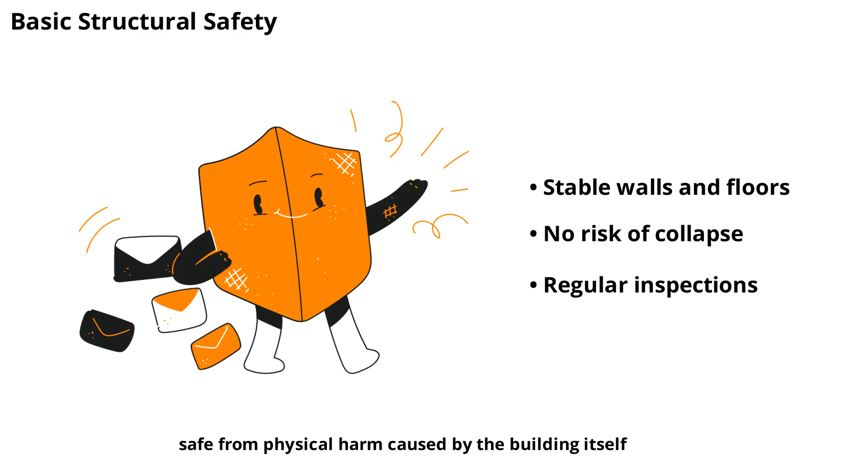One of the core aspects of habitability is structural safety. This means the building must be stable and secure. There should be no risk of collapse, and all walls, floors, and ceilings must be in good repair. Structural problems can lead to serious injuries or even fatalities, so regular inspections and prompt repairs are essential. A habitable home is one where you can feel safe from physical harm caused by the building itself.

Access to clean, running water is a fundamental part of habitability standards. Every habitable home must have a working water supply for drinking, cooking, cleaning, and bathing. The water must be safe and free from contaminants. If a property lacks running water or the water is unsafe, it fails the habitability test. This requirement is not just about convenience, it's about protecting health and hygiene for everyone living in the home.

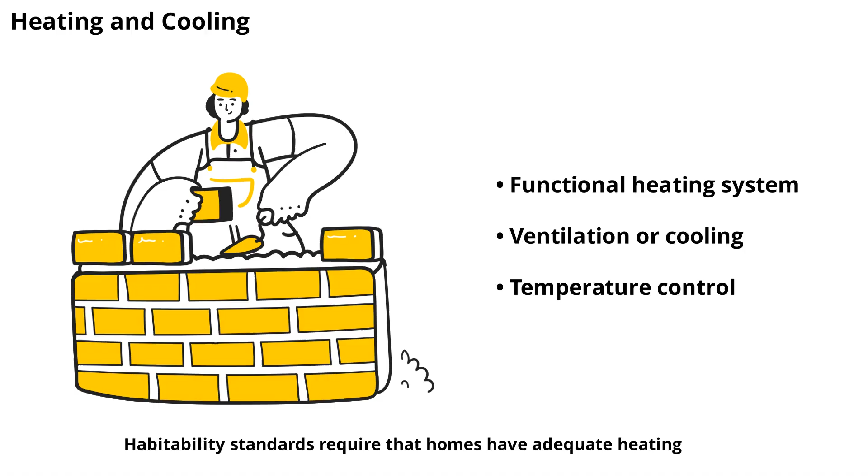Habitability standards require that homes have adequate heating, especially in colder climates. This means there must be a safe and functional heating system to keep residents warm during winter. In some areas, cooling or ventilation may also be required to prevent overheating in summer. Without proper temperature control, a home can quickly become unlivable, posing risks to health and comfort.

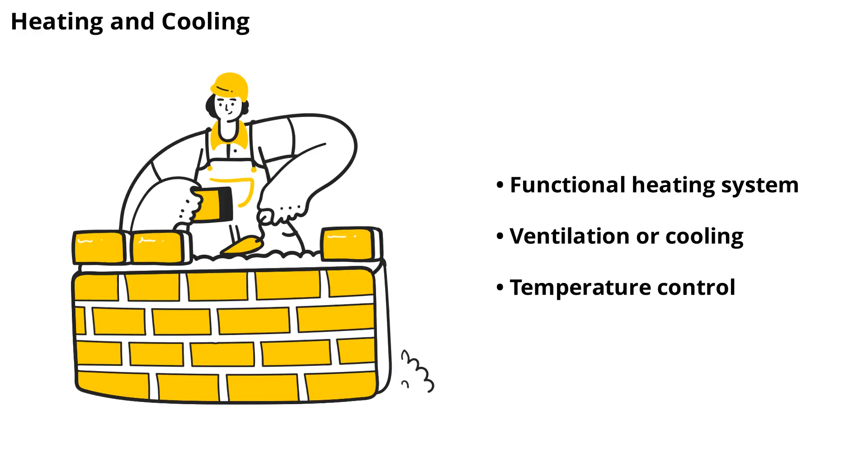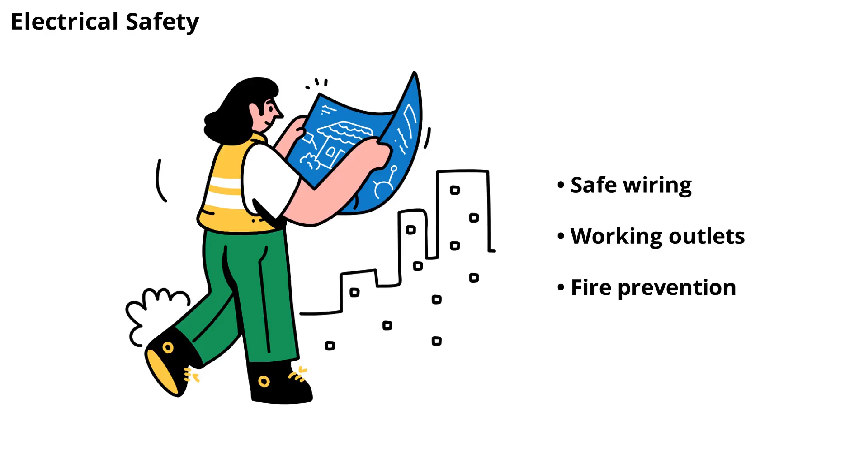A habitable home must have safe and reliable electrical systems. This includes working outlets, lights, and wiring that meet safety codes. Faulty electrical systems can cause fires, shocks, or power outages, all of which are serious hazards. Regular maintenance and prompt repairs are necessary to ensure that the electrical system remains safe for everyone in the home.

Proper plumbing is another key requirement. This means all sinks, toilets, and showers must work correctly, and sewage must be safely disposed of. Leaks, blockages, or sewage backups can make a home uninhabitable and pose serious health risks. Habitability standards ensure that plumbing systems are maintained and any issues are quickly addressed.

Habitability standards require that homes are free from infestations of pests, like rodents, insects, or other vermin. Pests can carry diseases and cause damage to the property. Landlords are typically responsible for ensuring that the home is pest-free at the start of a tenancy and for addressing infestations that arise due to structural issues or other factors beyond the tenant's control.

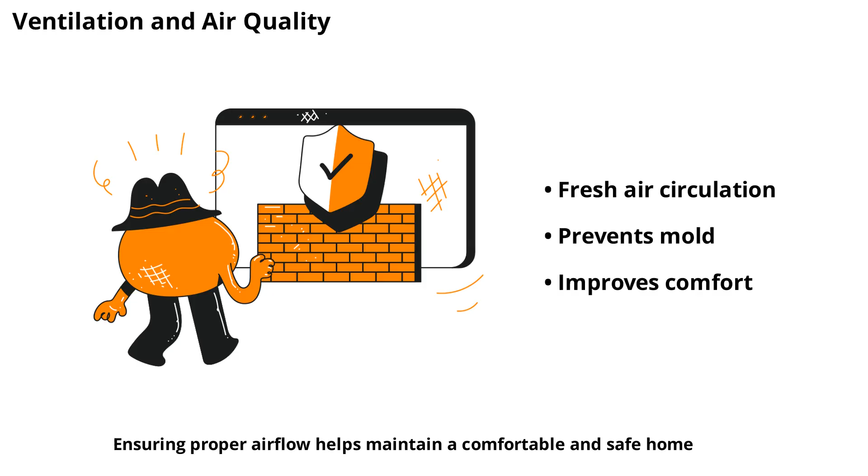Good ventilation is essential for a healthy living environment. Habitability standards require that homes have windows or mechanical systems to allow fresh air in and remove stale air. Poor ventilation can lead to mold growth, unpleasant odors, and health problems. Ensuring proper airflow helps maintain a comfortable and safe home.

A habitable home must have adequate lighting. This includes both natural light from windows and artificial light from fixtures. Proper lighting is important for safety, comfort, and mental well-being. Dark or poorly lit spaces can be hazardous and make daily activities difficult. Habitability standards ensure that every room has enough light to be used safely and comfortably.

Sanitation is a cornerstone of habitability. Every habitable home must have working toilets, sinks, and bathing facilities.

These must be kept clean and in good repair. Without proper sanitation, residents are at risk of illness and discomfort. Habitability standards ensure that everyone has access to the basic facilities needed for hygiene and health.

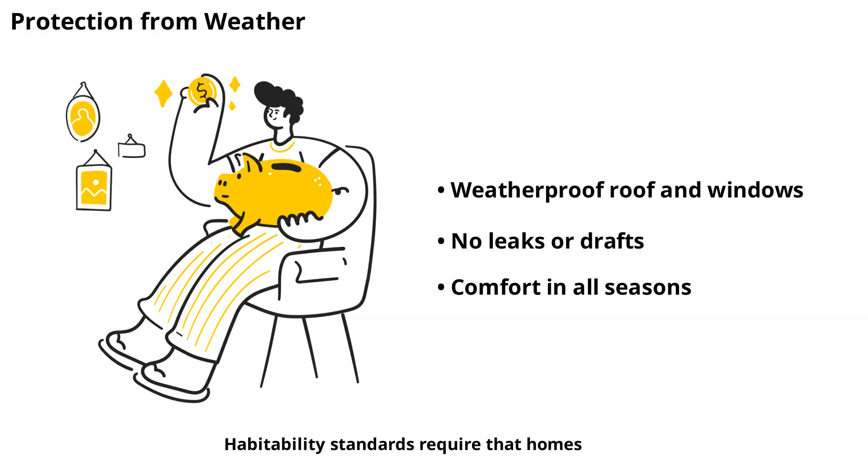Habitability standards require that homes provide adequate protection from the weather. This means the roof, windows, and doors must keep out rain, wind, and extreme temperatures. Leaks or drafts can make a home uncomfortable and even dangerous. Proper insulation and weatherproofing are essential for maintaining a habitable environment.

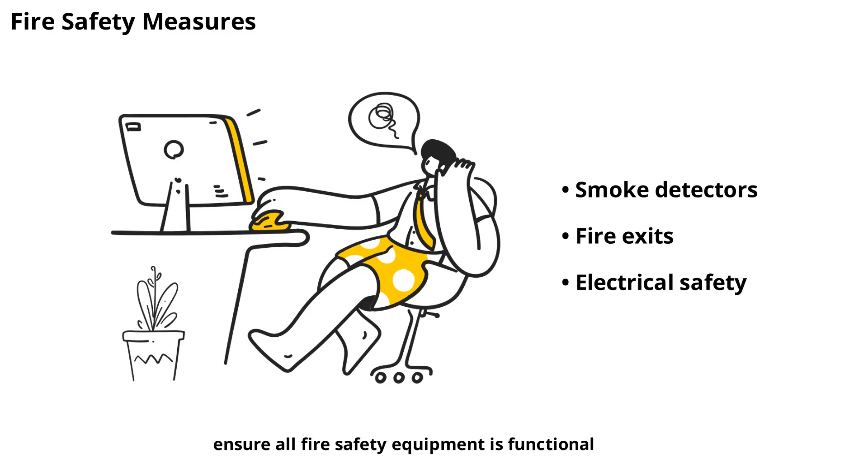Fire safety is a critical part of habitability. Homes must have working smoke detectors, fire exits, and sometimes fire extinguishers. Electrical systems should be up to code to prevent fires. These measures save lives and are often required by law. Regular checks and maintenance are necessary to ensure all fire safety equipment is functional.

Security is another important aspect of habitability. All doors and windows should have functioning locks to protect residents from intruders. In some areas, additional security measures like deadbolts or security bars may be required. A habitable home is one where residents can feel safe and secure at all times.

Stairs and railings must be safe and in good repair. Loose steps or broken railings can cause accidents and injuries. Habitability standards require that all stairs, handrails, and guardrails are sturdy and properly maintained. This is especially important in multi-story buildings or homes with elderly or young residents.

Older homes may contain hazardous materials like lead paint or asbestos. Habitability standards require that these hazards are identified and properly managed. Exposure to lead or asbestos can cause serious health problems, especially for children. Landlords must take steps to remove or contain these materials to ensure the home is safe.

Mold and excessive dampness are common issues that can make a home uninhabitable. Habitability standards require that homes are free from mold and have no persistent dampness. Mold can cause respiratory problems and other health issues. Proper ventilation, repairs, and moisture control are necessary to prevent these problems.

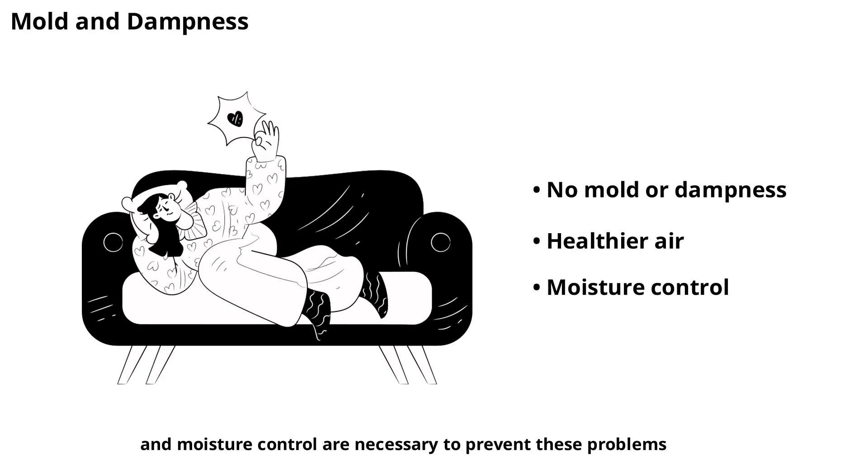Proper garbage disposal is required for a habitable home. There must be a way to safely store and remove trash to prevent infestations and odors. Overflowing garbage can attract pests and create unsanitary conditions. Habitability standards ensure that every home has access to regular waste collection and proper storage facilities.

Habitability standards often include requirements for minimum space per occupant. Overcrowding can lead to health problems and increased wear and tear on the property. Each resident should have enough space for sleeping, living, and storing personal items. These rules help ensure a comfortable and healthy living environment for everyone.

Accessibility is an important part of modern habitability standards. Homes should be accessible to people with disabilities, which may include ramps, wider doorways, or adapted bathrooms. These features ensure that everyone, regardless of physical ability, can live safely and comfortably in their home.

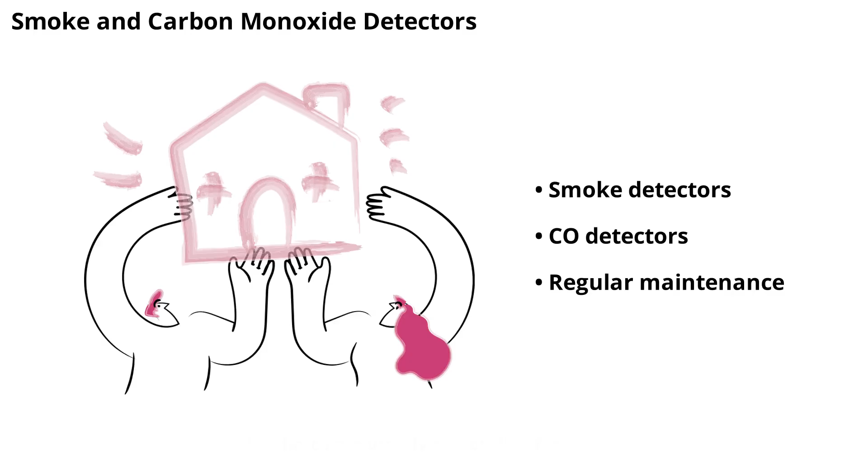Working smoke and carbon monoxide detectors are required in most homes. These devices alert residents to dangerous conditions and can save lives. Habitability standards specify where detectors must be installed and require regular testing and maintenance. Landlords are usually responsible for providing and maintaining these safety devices.

Every habitable home must have safe and accessible emergency exits. This means doors and windows that can be easily opened in case of fire or other emergencies. Blocked or locked exits are a serious safety hazard. Habitability standards ensure that residents can escape quickly and safely if needed.

Floors and surfaces must be safe and free from hazards. This means no loose tiles, torn carpets, or slippery areas that could cause falls. Habitability standards require that all walking surfaces are in good repair and safe for everyday use. This helps prevent accidents and injuries in the home.

A habitable home must have basic kitchen facilities. This includes a sink with running water, a way to cook food, and safe storage for food and utensils. Without these, it's difficult to prepare meals safely and maintain good nutrition. Habitability standards ensure that every home has the essentials for healthy living.

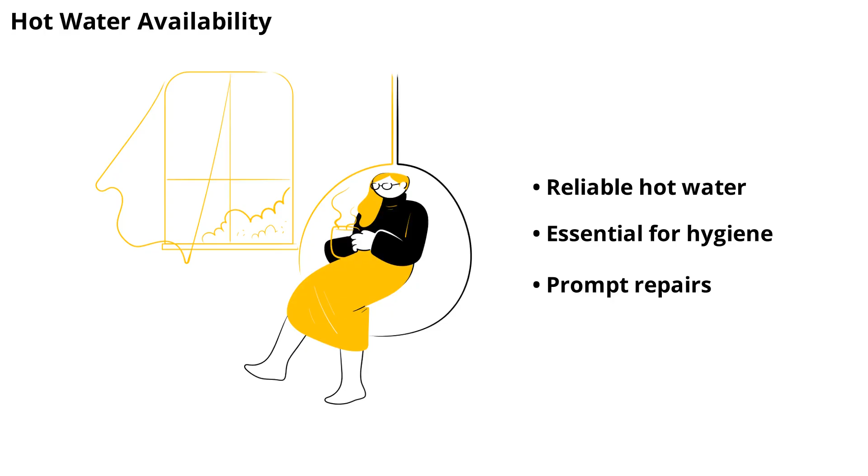Hot water is essential for bathing, cleaning, and cooking. Habitability standards require that every home has a reliable supply of hot water. If the hot water system fails, it must be repaired promptly. This is not just a matter of comfort, it's necessary for health and hygiene.

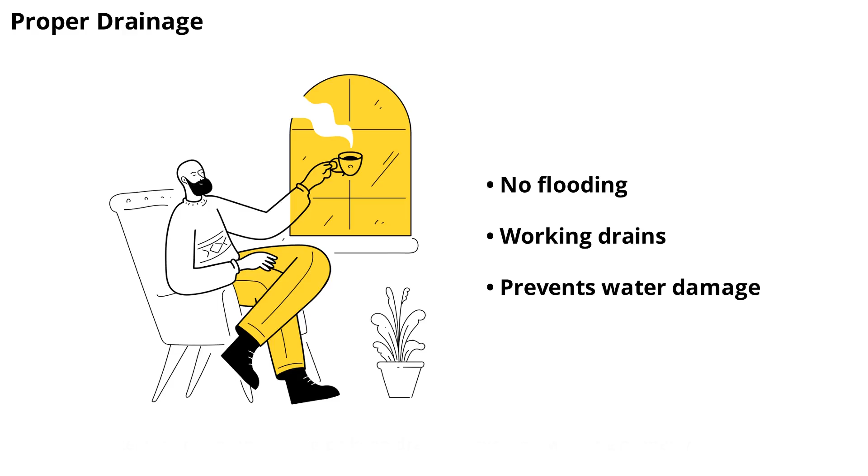Proper drainage is necessary to prevent flooding and water damage. Habitability standards require that rainwater and wastewater are directed away from the home. Blocked or broken drains can cause serious problems, including mold and structural damage. Regular maintenance helps keep drainage systems working properly.

If a home uses gas for heating or cooking, all appliances must be safe and properly maintained. Gas leaks can be deadly, so regular inspections and prompt repairs are essential. Habitability standards require that gas systems are up to code and that residents know how to report any issues.

Habitability standards also mean that the home must not be used for illegal activities. This includes drug manufacturing, illegal gambling, or other criminal behavior. Such activities can make a home unsafe and put residents at risk. Landlords and tenants alike have a responsibility to ensure the property is used lawfully.

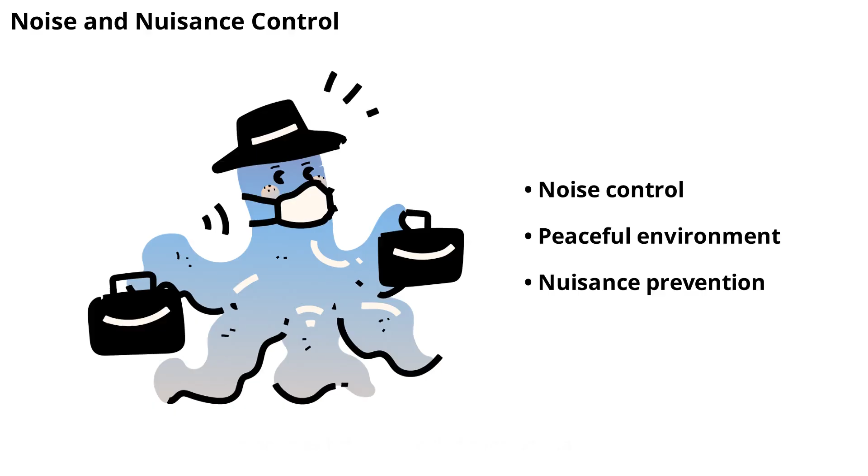Excessive noise or nuisance from neighbors can make a home uninhabitable. Habitability standards may include rules about noise levels and nuisance behavior. These rules help ensure that everyone can enjoy peace and quiet in their own home. If problems arise, tenants can often seek help from local authorities.

Both landlords and tenants have responsibilities for maintaining a habitable home. Landlords must make repairs and keep the property up to standard, while tenants must report problems and avoid causing damage. Clear communication and prompt action are key to maintaining habitability.

If habitability standards are not met, tenants have the right to report violations to local authorities. Many cities have housing departments or health agencies that investigate complaints. Reporting problems helps ensure that everyone has access to safe and healthy housing.

When a landlord fails to meet habitability standards, tenants may have several remedies. These can include withholding rent, making repairs and deducting the cost, or even moving out without penalty. The exact remedies depend on local laws, so it's important to know your rights and follow proper procedures.

Landlords also have defenses if accused of violating habitability standards. For example, if a tenant causes the problem through neglect or misuse, the landlord may not be responsible. Documentation and communication are important for both parties to protect their interests.

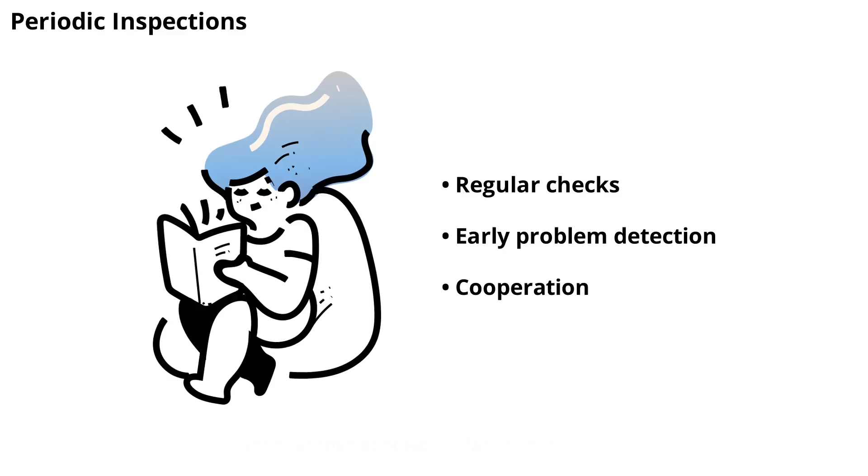Regular inspections help ensure that homes remain habitable. Landlords may conduct periodic checks to spot problems early and make necessary repairs. Tenants should cooperate with inspections and report any issues they notice. This proactive approach helps maintain a safe and comfortable living environment.

Habitability standards can vary by location. Some cities or states have stricter rules than others. It's important to check local laws to understand exactly what is required in your area. Local housing agencies or legal aid organizations can provide guidance if you have questions.

Habitability standards are not just a local issue, they're important worldwide. Different countries have their own rules and expectations for housing quality. While the details may vary, the goal is always to ensure safe, healthy, and dignified living conditions for all residents.

Housing inspectors play a key role in enforcing habitability standards. They visit properties, check for violations, and order repairs when necessary. Inspectors help ensure that landlords meet their obligations and that tenants have safe places to live.

Educating tenants about their rights and responsibilities is crucial. Many organizations offer resources to help tenants understand habitability standards and how to address problems. Informed tenants are better equipped to protect their health and safety.

Landlords also benefit from training on habitability standards. Understanding the rules helps them avoid legal trouble and keep their properties in good condition. Many local agencies offer workshops or guides for landlords to stay up to date.

Disputes over habitability are common. Tenants and landlords may disagree about what repairs are needed or who is responsible. Clear documentation, communication, and knowledge of the law can help resolve these issues fairly and efficiently.

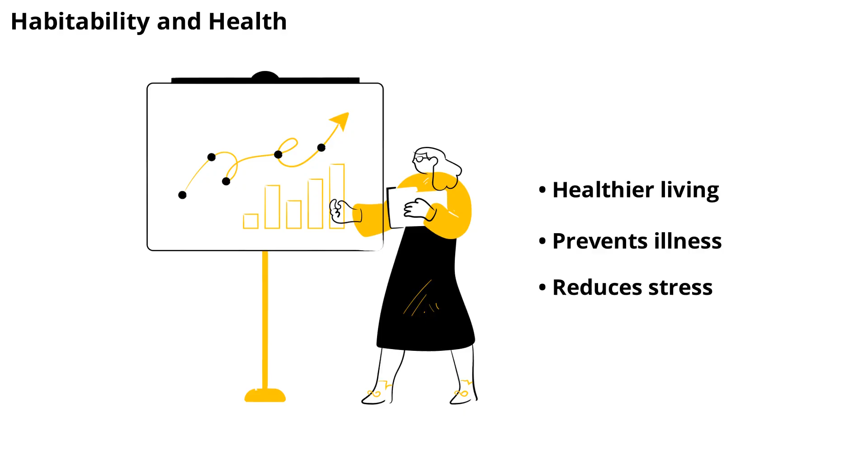There is a strong link between habitability and health. Poor housing conditions can lead to illness, injury, and stress. Meeting habitability standards helps protect the physical and mental well-being of everyone in the home.

Habitability standards continue to evolve. New technologies, environmental concerns, and changing lifestyles all influence what is considered habitable. Staying informed about updates and best practices helps ensure that homes remain safe and comfortable for years to come.

Let's recap the essentials. Habitability standards are the rules that ensure homes are safe, clean, and suitable for living. They cover everything from structural safety to sanitation, heating, lighting, and more. Both landlords and tenants have roles to play in maintaining these standards. Knowing your rights and responsibilities is the best way to ensure a healthy and comfortable home.

Thank you for joining us on this journey through habitability standards. Whether you're renting, owning, or managing property, these rules are designed to protect everyone's health and safety. By understanding and following habitability standards, we can all contribute to better, safer, and more comfortable homes for ourselves and our communities.